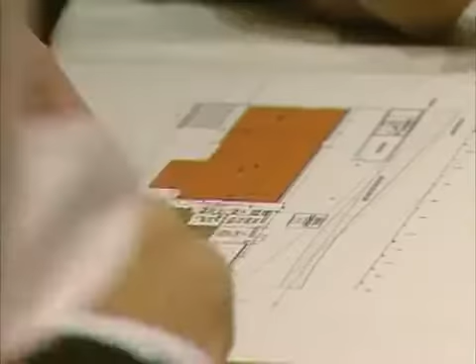Well, we had a very open brief. The club hadn't really attempted anything like this before, so they weren't dictating any particular method of working or role or brief for us. We formed a steering group with about 7 or 8 of the key people, consultants and clients involved with the job from pretty much the outset in March, April of 2000. We managed that group, and that really was the springboard for how the project started.

A major issue for the board of directors was to gain acceptance from the fans for a move from a much-loved home. This would be greatly helped by keeping Arsenal in North London. Not an easy task, finding enough land to host the footprint of a massive new stadium and the associated increase in traffic to and fro.

Amazingly, the Arsenal directors managed to find a site only a few hundred yards from Highbury, but it was far from deserted. We very quickly realised that the project was broken into 3 fundamental parts: a new stadium, a relocation site at Lough Road where we would have to provide a lot of the facilities that were on the Ashburton Grove site, and then the final phase was Highbury Square.

Ashburton Grove is roughly a triangle. To the west and the east are mainline railway lines, and to the south a small industrial estate. In the centre lay a council-owned recycling unit, and this would need to be re-sited at cost to the club, as would the acquiring of the industrial units.

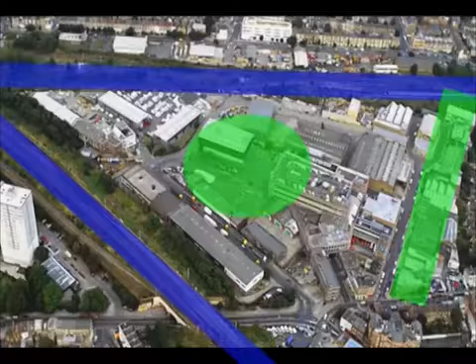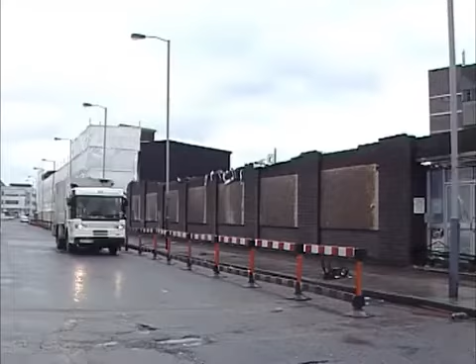The rest of the project included the very substantial relocations of the North London Waste Authority's waste transfer station, the council's depot, their building maintenance department, and then there were a myriad of other occupiers on the site who all had to be relocated and their site purchased, or just a straight site purchase. That actually became the major focus of the first 3 years of the project.

The entirety of the site included land beyond the boundaries of the railway lines and beyond the Southern Road, and whilst this extra land could all be used, the stadium footprint would have to be within those boundaries.

A key decision was taken to appoint a builder during the design process, not always the case in such projects, and a decision which in retrospect was fundamental to the outstanding success of the project.

Well, we had a very interesting shortlisting. We started with about 6 companies who we thought might be capable of building the new stadium. Really at interview, 2 or 3 of those companies didn't really fit the bill. And then McAlpine were the most memorable, really.

At interview, Rolf Christensen very much came across as somebody who wasn't in any way or shape concerned about the magnitude of the project, wasn't overwhelmed by it, and was very confident, and even relished the deadline nature of building stadiums and having them open for the beginning of football seasons.

An obvious but crucial design decision was choosing the distinctive shape of the stadium. A more conventional rectangular design was discounted, as it was too wasteful of much needed land, and in the end it came down to simple geometry, in that the elliptical shape fitted snugly into the triangular nature of the site, squeezing every inch from the available space.

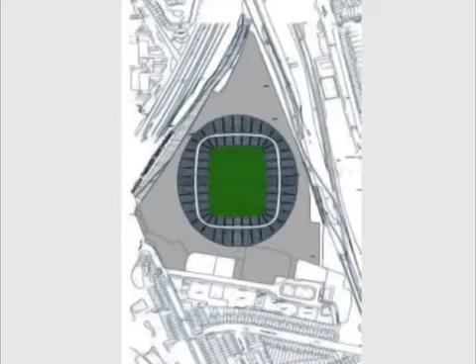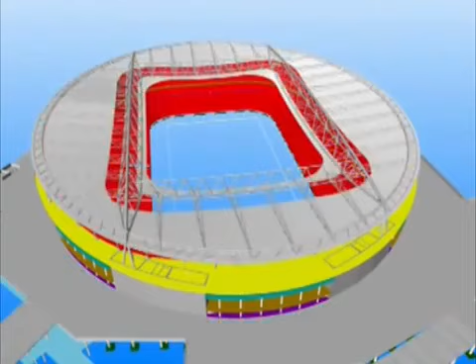And we were all new to it, so we all sat down and discussed every part of it, what was required, and they had traveled around at stadiums all over Europe, perhaps the world, and then they had an idea what they wanted. And we together worked very hard to get what they wanted for us onto a piece of paper and get the engineering right, and that was a real challenge.

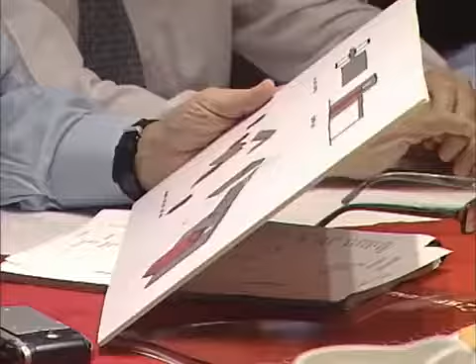And the time we spent, the 6 months pre-construction, without it I think we would have had a few problems, and we avoided problems. Basically the construction went like clockwork, and we completed it within time, and even handed it over earlier, so it went well.

To gain planning consent, the club would need to demonstrate that 60,000 fans could come and go to the ground with as little negative impact to the local community as possible, preferably using public transport. Two massive bridges were designed on the east of the site spanning the railway line, taking fans to both underground and above ground stations.

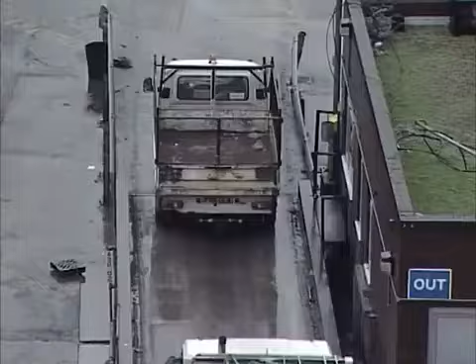Another obstacle was the recycling unit at the site's very centre. This would have to remain very much in operation through the early part of the build, whilst a new unit in Lough Road was constructed.

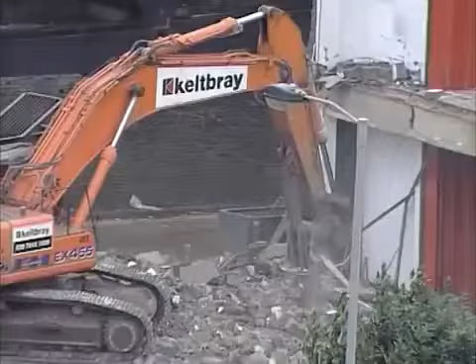Positives to the community were needed, in addition to a new recycling unit, and it was determined that the stadium would generate much more than simply a new football ground. Areas within the site would contain affordable housing and give the companies on the industrial estate a chance of resettling into new premises. What was known at this stage as simply Ashburton Grove would be a much needed and major regeneration of the area.

With designs finalised and consents gained, some 2,500 signed documents later saw demolition teams move into Ashburton Grove in February 2003, and McAlpine's site teams settling into their new offices. Again, having designers, engineers and management on site was an important ingredient in the project's success.

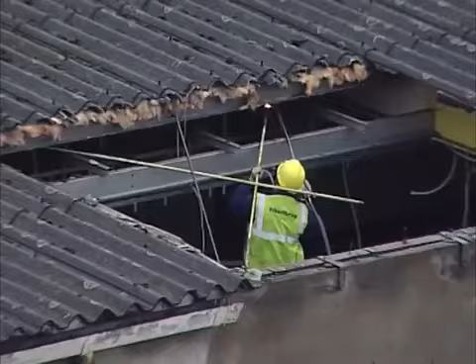Just as things were starting to happen, it all ground to a halt. It was about the end of March 2003. We'd been through, without doubt, the toughest year on the project, and we'd been going through all of the contract negotiations with McAlpine and the funding with the banks. And we finally had virtually every one of our ducks in a row.

Both myself and the client separately went off on holiday at the end of March. And when I got back a week or so later, I went in to see him, and he gently dropped the bombshell that one of the banks had pulled out and that the funding wasn't now possible for the stadium.

Work stopped and the site was mothballed, though Sir Robert McAlpine used this pause in construction to continue design development and progressing the Lough Road Waste and Recycling Centre.

Today is a historic day in the life of Arsenal Football Club. I'm delighted to be able to announce that the funding has been secured for our new stadium project.

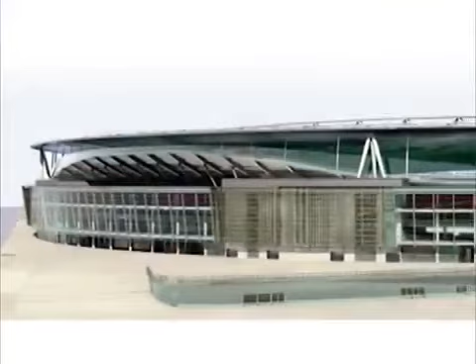By the time the funding came in, that was 4 years on the project, and I think everyone had put so much into it that the thought of it not proceeding was awful. So there were some pretty major celebrations at the end of February when the banks finally signed up.

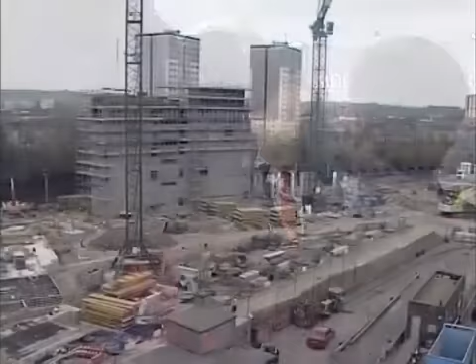With the funding now in place, McAlpines resumed work immediately and with some haste. If milestones along the critical path were not met at this early stage, it might have had significant impact later in the project, and railway possessions and such like had been booked well before there was a hiccup in the funding.

If the Arsenal board hadn't funded the continued fabrication of the bridge components, and if it wasn't for the speed in which McAlpines resumed construction, there could well have been delays.

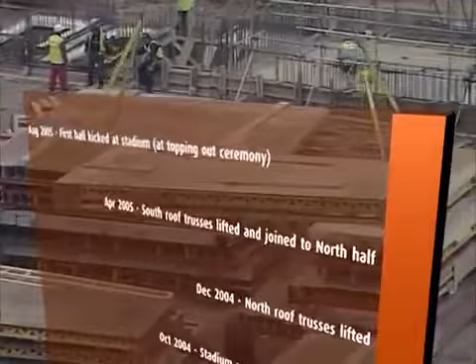But within a matter of weeks, the stadium started to take shape, and the practicalities of the construction programming became evident, with one end of the stadium apparently racing ahead. Of course, this was far from the case.

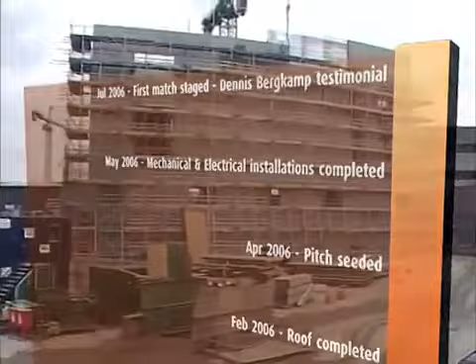Crucially, the bridge's construction had to be on time. Their assembly site actually fell into the path of the stadium, so they needed to be built and moved into place so as not to delay construction to the south end of the stadium.

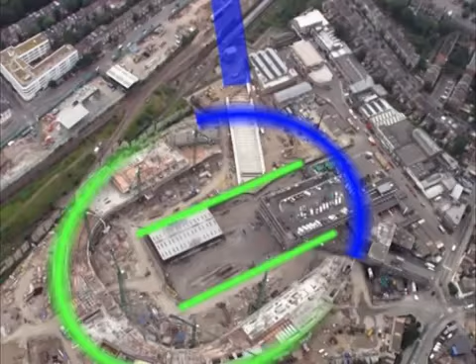Because of the constrained nature of the site, the construction programme was to commence on the northern parts of the stadium first, leaving space for the bridge construction and the continued use of the recycling unit, and afterwards programming the construction of the lower terracing in the south stand to create enough space for the roof truss assembly. Any delay to either the bridges or the roof would delay the fundamental stadium structure.

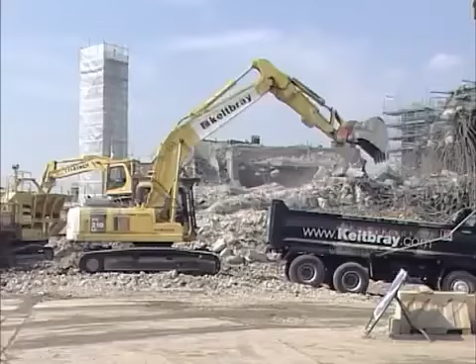We were knocking the buildings down as they were being vacated, or in the first instance having the services isolated. Building vacated, demolish, remediation, then piling, and subsequently following on as closely as we could behind the piling with the substructure. So you have a fine balance all the time in terms of trying to do one operation as close as you can to the next without losing efficiency in either operation.

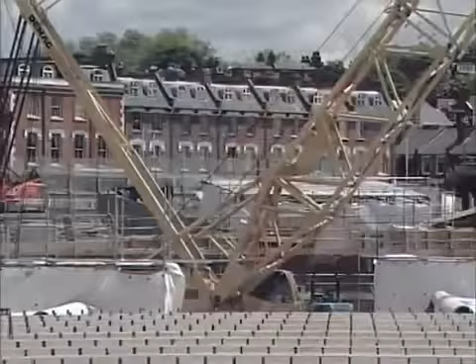Because of the unusual nature of the site, roughly a triangle surrounded by railway lines on two sides, one of the key aspects of the design were for two bridges to be constructed on the northeast and southeast of the site. To get the crowd away, we built two bridges across the railway line, and they are massive bridges. One is 25, 26 metres wide and the other is 18 metres wide. It is two massive bridges just to take the crowd and spread the crowd.

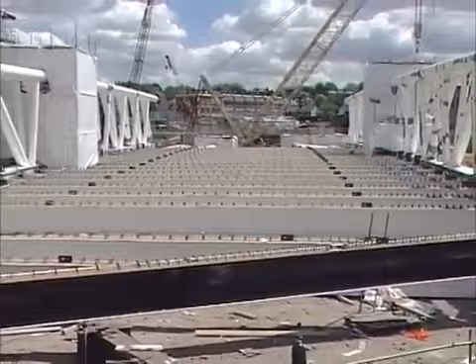There had been a few disasters with football stadiums and crowds, and all this was taken into consideration in the design. People can escape all over the place. Because the stadium structure would fill a huge percentage of the total site available, elements of these bridges needed to be built and completed before the stadium structure was in place.

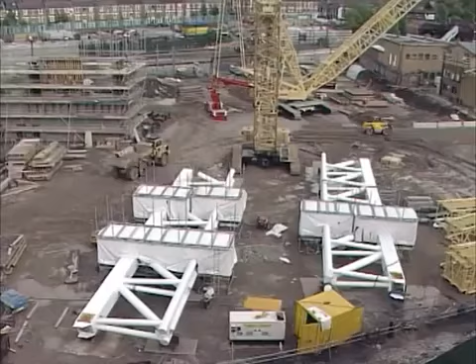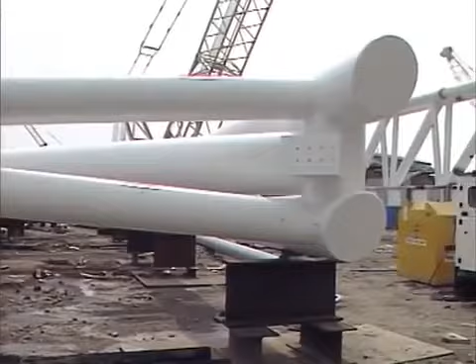The other intricacy with the site was the extent of the works we had to build on the site, which weren't necessarily related to the arena. The two bridges are good examples of this, as they were assembled in the plan area of the stadium and thereby occupied space that we needed to free up to build the stands.

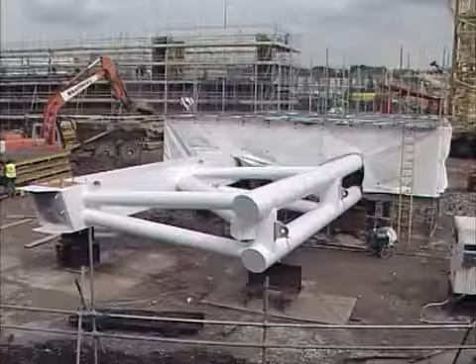The South Bridge in particular sat in the middle of the southwest of the stadium and was built as a whole 100-metre section bridge and then slid across. Until that bridge was located over the railway line and slid into place, that section of the stadium couldn't be built. The same went for the North Bridge up in the northeast corner, whereby elements of that were built on the site of the stadium and it needed to be positioned, with dependency on getting rail track possessions to install the bridge.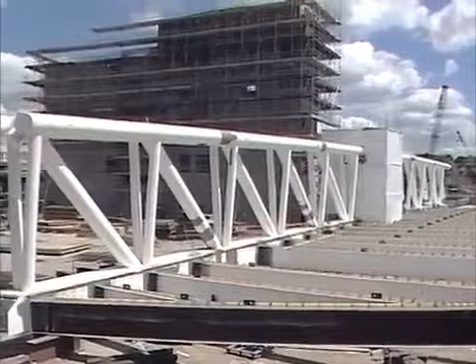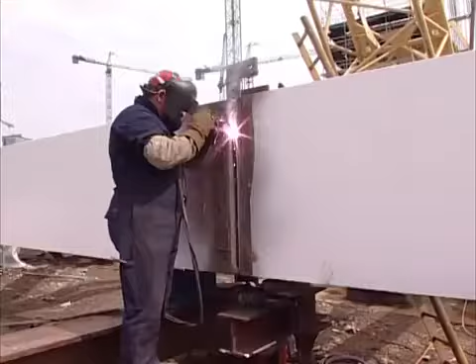So quite high levels of risk in terms of third-party approvals, and the consequence of not getting the bridge in place was a critical path delay in the stadium. The North Bridge was the first to be completed and was built on site from pre-produced sections. The construction team always knew that their positioning on time would be critical to the completion date, and when the funding hiccup in 2003 took place, the good relationship between constructor and client proved crucial.

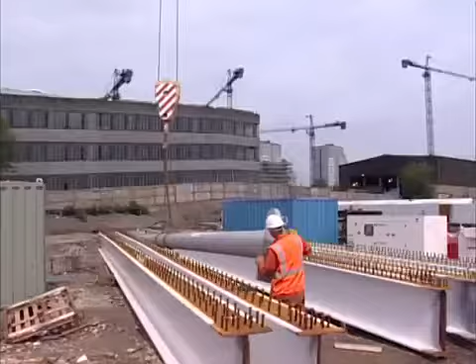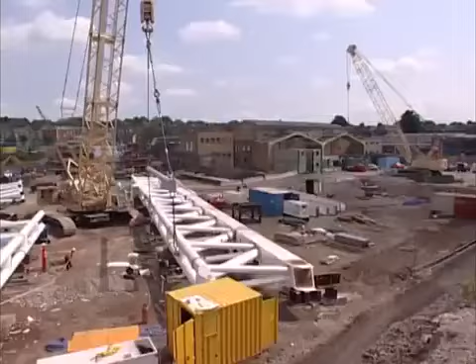We booked that possession 36, 38 weeks prior with Railtrack, so that weekend it had to be ready. To give an example of how committed Arsenal were, that was on the critical path, and then construction was stopped in April 2003 because they didn't get the funding, and obviously it was a long lead-in for material.

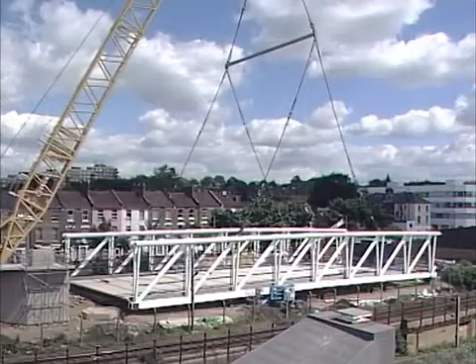Arsenal, with their own money, funded the procurement, all the material, the steel, and also the fabrication. So whenever they got the funding, 1st of April, we were ready to go, and we managed to get it across in 15 or 16 hours in the middle of August. That was critical because we couldn't construct the east stand otherwise. It was an achievement, and everybody pulled together, and it worked out great.

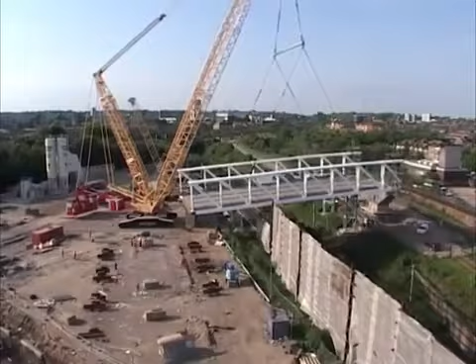With roads and railway lines closed, the North Bridge was ready to be lifted. Built in two halves of 180 tonnes each, the sections were eased into place by massive 750-tonne cranes over two weekend possessions. The second bridge, the South Bridge, was a different animal.

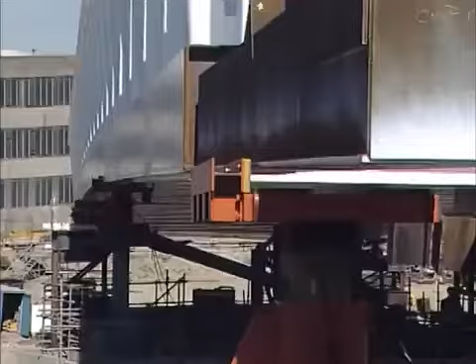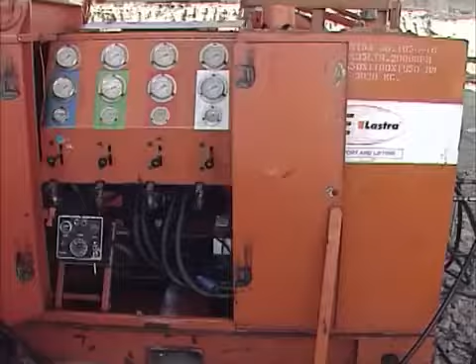It is 100 metres long and weighed 1,000 tonnes, and we basically couldn't get a big enough crane to lift it across. So we had to build it inside the stadium, inside the east stand, and we were then sliding it across.

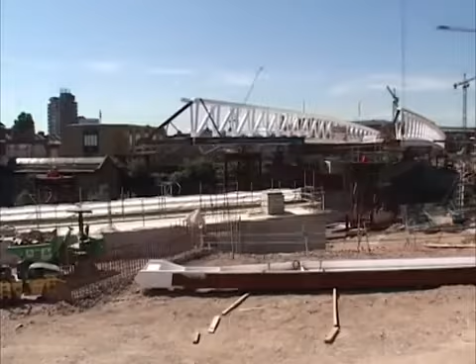A Dutch specialist contractor oversaw this amazing technical operation. A heavily greased 1,000-ton bridge was gently but steadily dragged across Drayton Park Station with amazing precision. The bridge's completion and its moving away from the actual stadium structure allowed the southeastern section of the stadium to be commenced, and a major milestone on the critical path was completed on time.

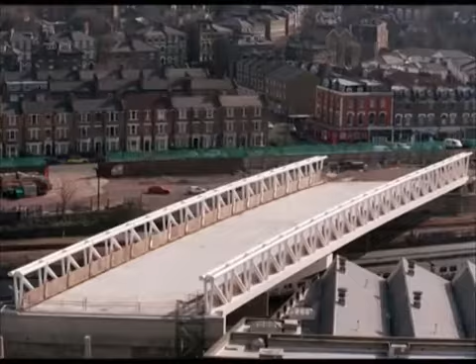With the bridges in place and away from the stadium area, attention turned to the closing of the recycling unit. Away from the glare of publicity that Ashburton Grove was creating, across town in Lough Road, the landscape had changed, and the new recycling unit was completed and opened. Built in isolation, this would have been considered a major project in any local community, and was a tangible sign to the local population of the benefits the new stadium would bring.

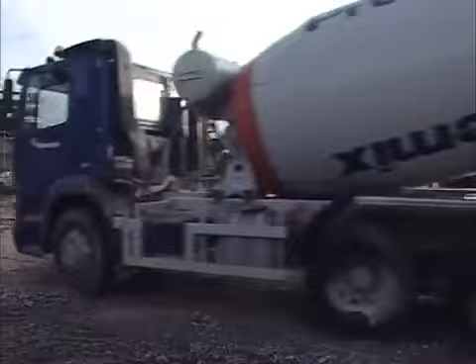Now that demolition of the waste unit could commence, work could begin on the two southernmost cores, and the area that would become a world-class football pitch could be cleared and levelled.

On the 22nd of October 2004, the Arsenal directors made another important announcement. Construction of our new stadium has progressed at a fantastic rate, thanks to the great work by our stadium constructors, Sir Robert McAlpine. With the opening of our stadium in the summer of 2006 quickly approaching, we're delighted today to be announcing a significant partnership which will lead us into this new chapter in the history of Arsenal. This relationship is for both a naming rights partner for the new stadium and also a club sponsorship agreement, representing the biggest ever financial sponsorship deal in English football. So it is my honour to announce the beginning of the partnership between Arsenal Football Club and Emirates. Ashburton Grove was now to be known as the Emirates Stadium. A major sponsorship deal had been signed, and any financial worries for the board started to seem a lifetime away.

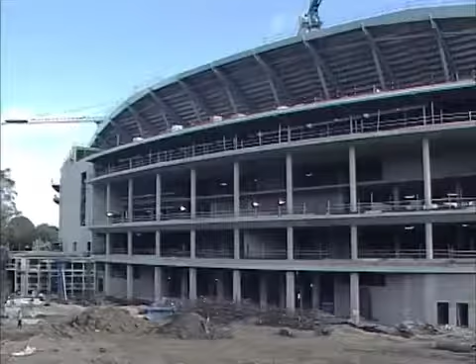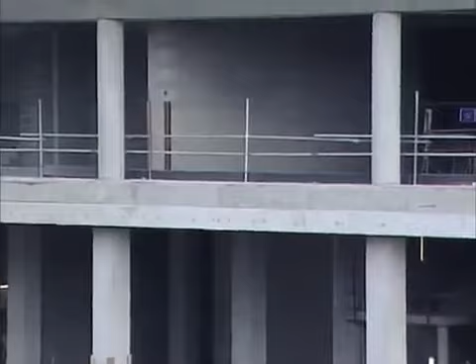The other aspect of the stadium is that on the 7 hectares footprint, the stadium covered the whole area. There was no spare land left at all. And then you consider there are maybe 600, 700 or 800 car parking spaces below, which helps everybody. It's quite unusual that within the stadium you have parking facilities. The stadium has a raised podium, so everything at ground level is either car parking, changing rooms, kitchen, storeroom and maintenance room. But all that had to be squeezed into the footprint on this triangle we had at the stadium.

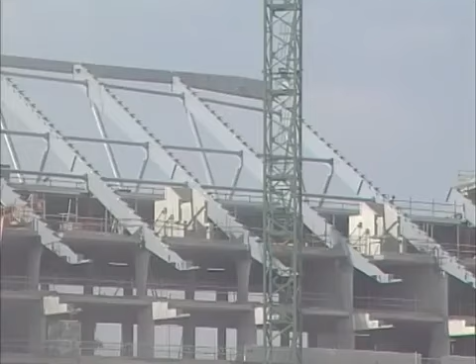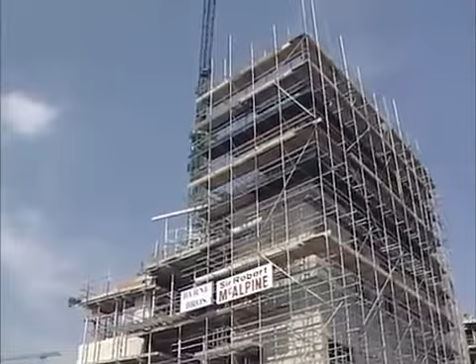The northern end of the stadium raced on ahead of the southern end, until both bridges and recycling units had moved. Then the southern cores could be built, but leaving out the southern prefabricated terracing units to allow space for the roof trusses to be swung into position. Only once the roof trusses were in position could the full stadium continue on to completion.

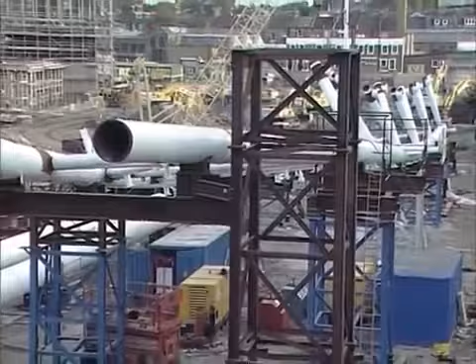The roof trusses had to be built in the same way as the bridges. Prefabricated components were shipped onto site, joined together in the future pitch area, and then hoisted into position and bolted together. The roof was a real challenge.

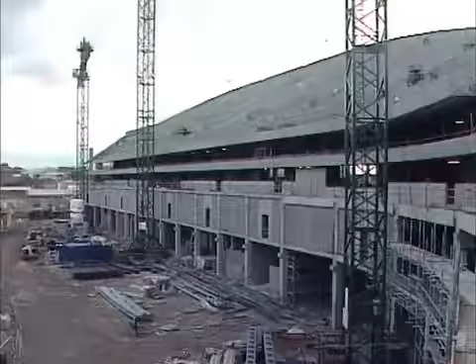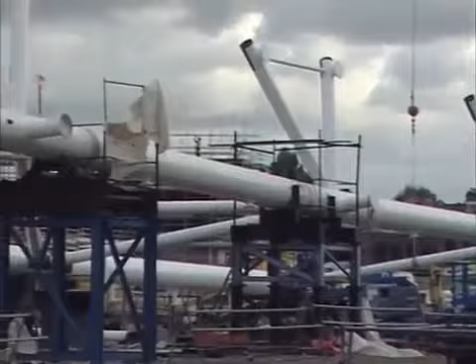Historically, stadiums have had problems with the roof. We obviously spent a lot of time together with Watson. Watson's engineering is very, very good, and they are tubular specialists, and we had used them previously. We spent a lot of time with them and the structural engineer, Buro Happold, going through how we were going to fabricate it and how we were going to erect it. We simplified it, and it was decided originally we were going to lift it in one - this 220 metre long steel truss, 800 tons - but then we decided to lift it in two halves and prop it.

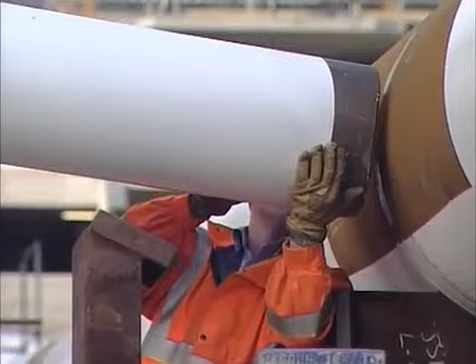With this X-model design they used, that meant every piece of steel went up fitted - it didn't have to be taken down or remade. This X-model in the design was definitely a big help for us, and it worked out well. We were able to erect the roof steelwork in 6 months, including all secondary steel. We fitted the secondary steelwork at site level, so it went up already fitted, which reduced the programme and also reduced the health and safety risk for people working up in the air. It was all bolted together - no welding up at the top - and it went well.

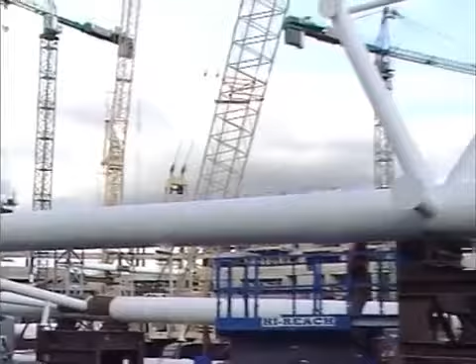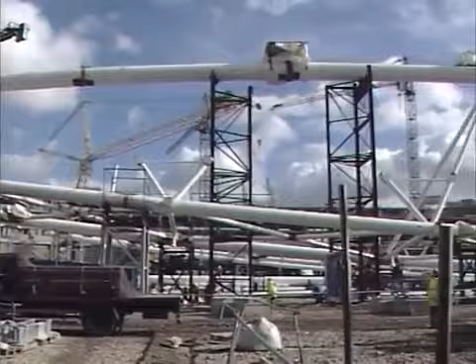The obvious example would be the roof, in terms of identifying how we were going to erect the primary and secondary trusses, since the trusses were longer than the space available to sit them down in the middle of the pitch. To try and assemble a complete truss on the ground inside the stadium would mean elements of that steel truss sticking into the reinforced concrete structure, thereby fragmenting the ellipse. So a very early objective was trying to enable us to build a continuous ellipse, albeit with the lower tier front left down. By having a complete ellipse, it then allowed us to set commissioning zones and installation zones for the services and the fit-out.

Even with the programmed completion of the lower southern terracing, there simply wasn't enough space within the stadium pitch area to build the entire roof structure in one go.

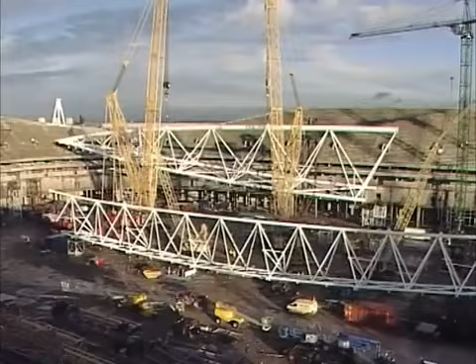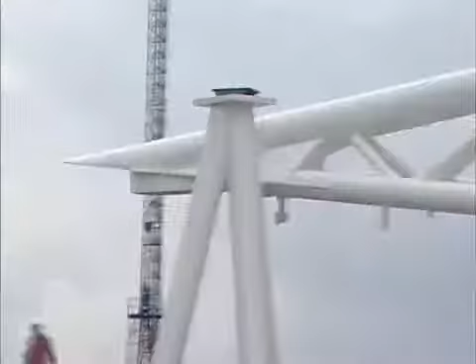The northern end was built first and lifted in December 2004. Then the southern end was built and lifted the following April. The cranes were back, and the sections were lifted onto four gigantic tripods in each corner of the stadium, supported at the midpoint on temporary trestles.

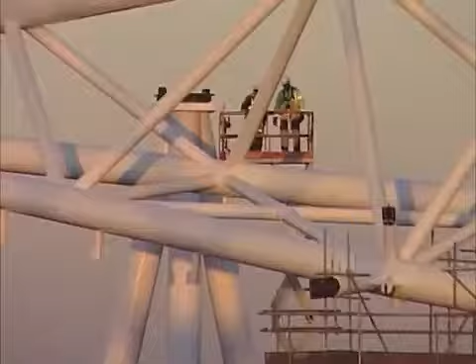The installation of the roof trusses freed up commencement of the lower terraces, particularly in the west stand, where all the players' change areas, referee change and so on are located. There were quite a lot of rooms beneath those lower terraces, with all the associated services, plumbing and showering. It was critical to get out of the way to complete the frame.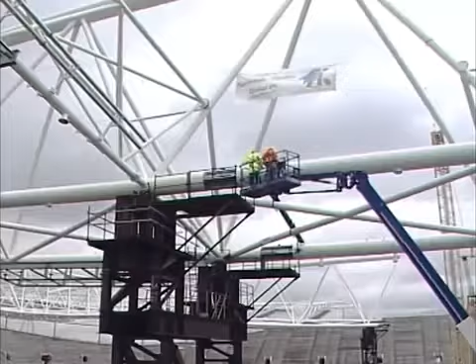Finally, when all in place, Arsenal director Danny Fiszman was lifted into position to place the ceremonial bolt joining the two roof halves together. With the roof trusses now in place, the future pitch was now clear and the race for completion was on.

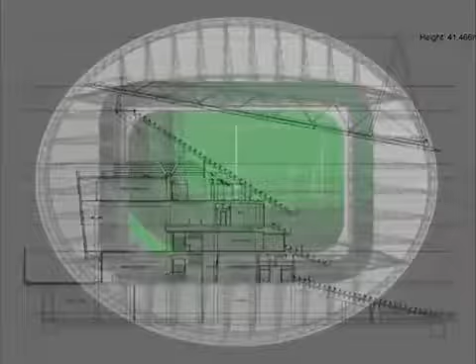The inward sloping nature of the roof presented a number of challenges in terms of removing water from the internal perimeter and allowing sufficient sunlight onto the pitch, to prevent the problems other stadiums had with reduced sunlight affecting their playing surfaces.

The roof is all in one piece and moves around with temperature and wind, and moves quite a lot. Therefore the glazing that fits between the roof and the top of the concrete stands, which is glass in steel frames, has to articulate quite significantly to accommodate that movement. So it not only leans, but it leans inwards and outwards and sideways both ways.

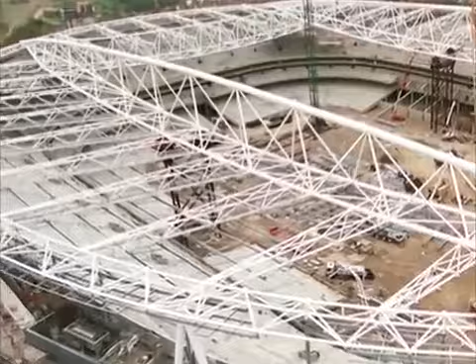Getting that to go up looking right, and have enough movement capability in it to accommodate what's going to hit when winter comes or summer comes - and we had some hot temperatures in the summer and some cold temperatures in the winter - was interesting.

The stadium structure was now complete, and another key milestone, the attainment of full height, was celebrated with a traditional topping out ceremony on the 15th of August 2005.

A team of Arsenal directors played a team of Sir Robert McAlpine management and other project partners in the first game of football to be played at the Emirates Stadium.

The major structure was now complete, and the job of fitting out this enormous stadium was to begin.

We've got 10 chillers with a capacity of about 5 megawatts of cooling capacity. We've got over 50 air handling units. We've got about 40 catering establishments, whether it be kitchens - one large kitchen, a central processing unit - with about 16 kitchens and 20-odd catering establishments. So it's quite a large distribution system.

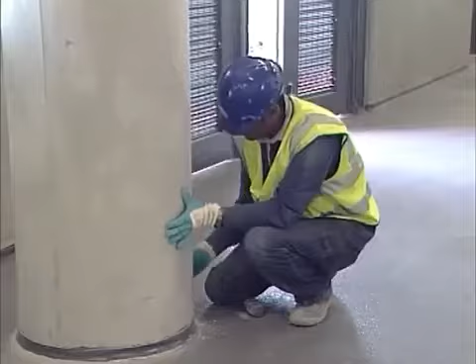When the stadium was designed, with the initial funding concerns, the interior was designed as a basic fit - piping in toilets would be exposed and blockwork would be more visible. As more investors came on board, and with the Emirates sponsorship sealed, an upgrade in the fittings and fixtures was now possible. Then came a new challenge with the catering.

The catering contractor pulled out. It was a problem - they didn't have anyone to fit out the kitchen and the concessions. They came in and said, what can you do? And together, we fitted out the kitchen and the concessions.

Over the course of the stadium build, over 300 changes were made to the original design. It's a testament to the relationship between client and constructor that most were agreed on a handshake, and all were achieved within the agreed contract price. In the contract they said they wanted the same quality pitch as they had at Highbury.

Highbury was known to have had the best pitch in the Premier Division. The original design of the pitch had a set of sight lines which, under UEFA conditions requiring bigger advertising boards, would block sight lines on certain groups of seats. This had been laid out by the designers knowingly, but as the job progressed, we worked on trying to change the pitch levels to optimise sight lines relative to advertising boards.

As far as the advertising boards were concerned, electronic boards were introduced as a fairly late change, which required trenches around the edge of the pitch and a significant amount of servicing. So even the pitch was subject to change and development. We never fell behind programme, so there was opportunity to carry out additional works, develop the design and improve it.

The pitch, after they've played 20 odd games, is in fantastic condition according to the Arsenal board. The top two sides in the Premiership go directly to the group stage of the Champions League.

Arsenal were lagging behind the top two, which would require them to play a qualifying match in early August, while the contracted date for completion was August 1st. With ramp-up events needed prior to granting a safety certificate, the club had to ask McAlpine's to try and finish early. It was vital that it was finished.

By working together in the last 2 months, they installed the IT and telephone lines, all the furniture was being installed, and the kitchen was being commissioned.

We did our commissioning and snagging and de-snagging. Suddenly, where we expected to have 400 or 500 people on site for the last month, it was 1,500 people on site. On top of that, training was going on with all the stewards - Arsenal has about 1,000 stewards - and that was going on at the same time.

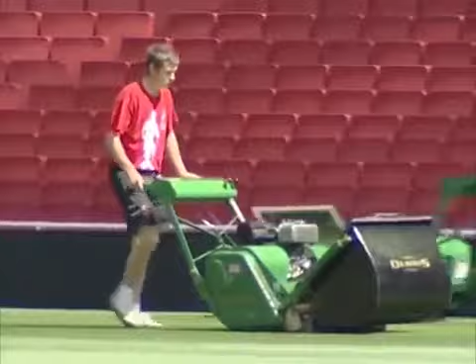In the climate of delays to the new Wembley project, the Emirates team set a completion date in July, with a first match on the 22nd of July - Dennis Bergkamp's testimonial, Arsenal versus Ajax.

7 or 10 days after we got practical completion, they had 54,000 people in the stadium for the Bergkamp testimonial, and everything worked satisfactorily - spectators in and out, the IT, etc. The Arsenal directors said afterwards, 'It's unbelievable, we've had 54,000 in and no snags at all.'

For me, to see 54,000 people in and have it work was the acid test, and I think that's what I would never forget.

I think it was a model project in terms of being a fast project which we completed on time. We obviously completed it within budget, both of which are huge ticks in the box for any potential client, and they're not easy things to deliver.

My primary memory is coming over the South Bridge with my wife and two sons to the Bergkamp testimonial. That's the thing that will stick with me as a lasting memory. It was probably the first time it really dawned on me, seeing everybody coming into the stadium, just what it was. So that'd be my abiding memory.